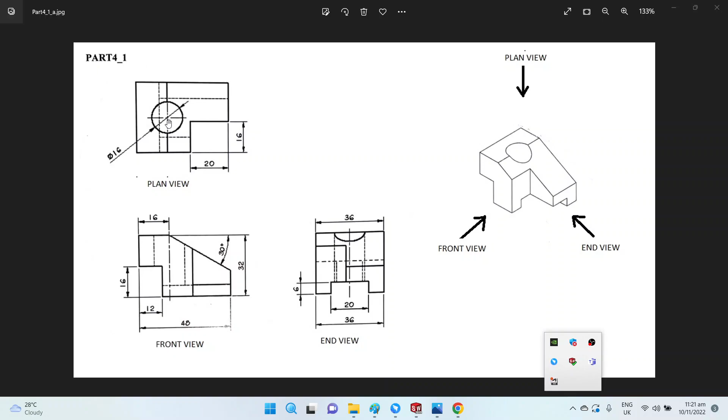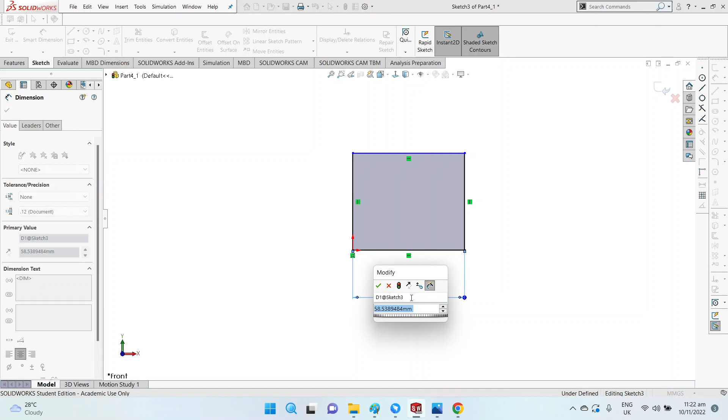Without further ado, I'll create a sketch first on the front plane. This time I'm drawing a straight rectangle with dimensions 48 millimeters in length and 32 millimeters in height. Then I will extrude.

I'll extrude from mid plane to a distance of 36 millimeters. Once that's done, I'm going over to the chamfer, found with the fillet command - click the black triangle and choose chamfer. Previously we used distance and distance options; now I'm choosing distance versus angle.

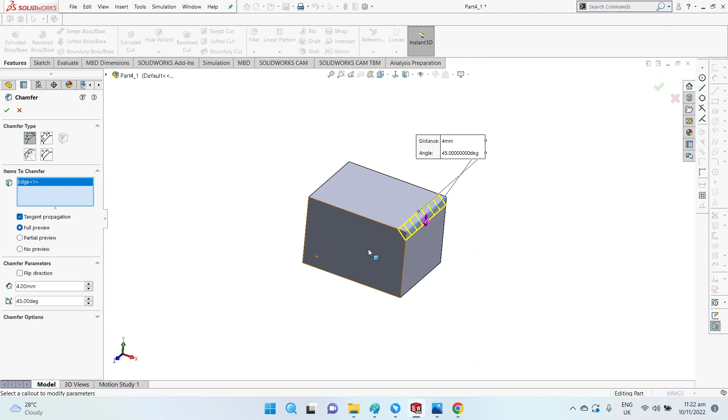I will choose this corner, and if you zoom in, let's drag this picture here. You'll see the distance of 4 millimeters is pointing down towards this point, meaning from the corner it goes down by 4 millimeters, which isn't what I want.

I want the distance to be from the corner along the horizontal plane, not the vertical plane. So I'll click flip direction, and it will flip so the distance goes from the corner along the horizontal plane.

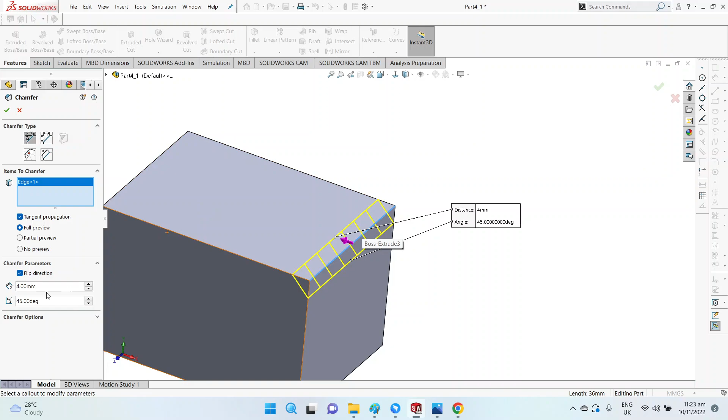Now the angle is 30 degrees, so I'll change the angle to 30 and enter. The distance is actually 48 minus 16, which gives us 32. When this is done, I click accept. This is what I have.

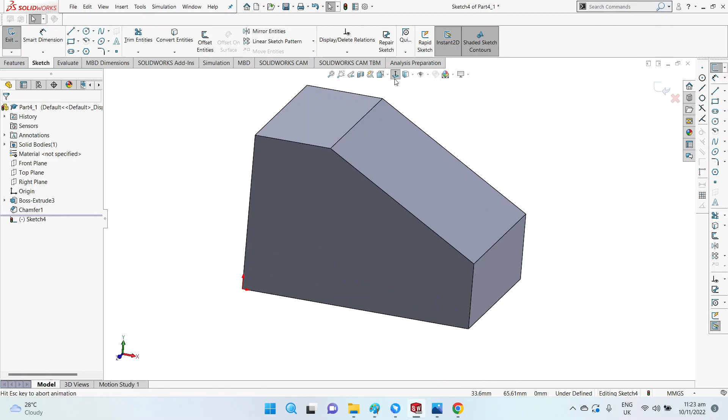Now once this is done, I'm going to create my sketch. I'll do the cutout at the bottom left hand corner. This time, instead of doing the constraints, I'll skip that since I've already explained and shown you. So I just snap to the orange dot.

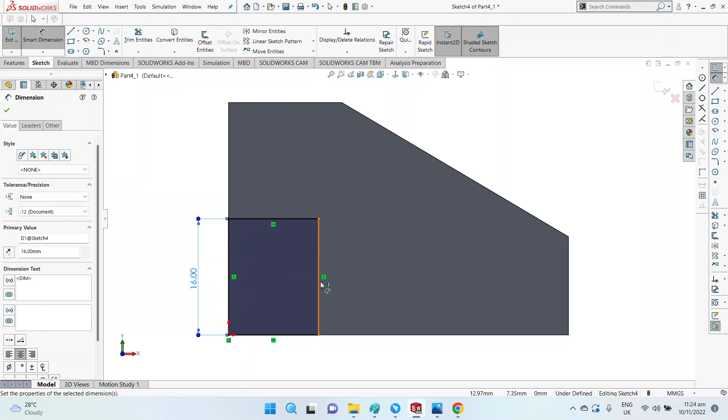You'll notice the two vertical lines and horizontal lines closest to the dot are fully constrained - they are black in color. Then I dimension the vertical height and the horizontal distance, which is 12 millimeters.

Then I will extrude cut the entire feature through all. Then I'll select sketch - wait, hang on for a second - yeah, select sketch on this surface from the top, and I'll do the cutout from the corner over here.

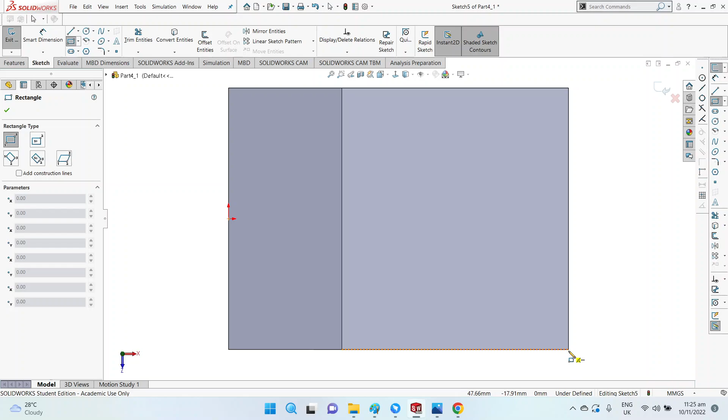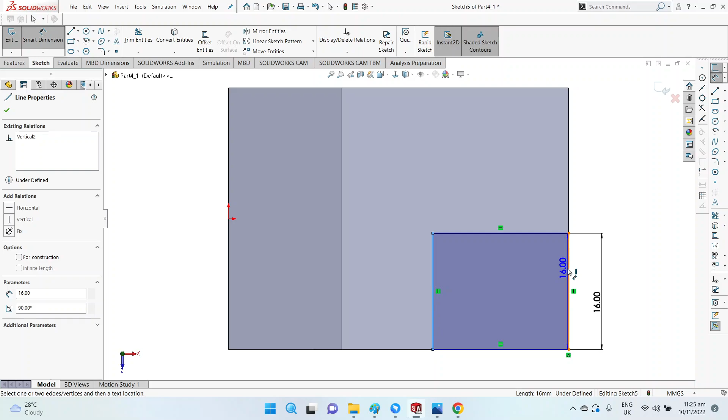Same thing, I move my mouse to the orange dot, select it, and drag it up. Then I dimension it. You see the horizontal line and vertical line are fully constrained. The height here is 16 millimeters, and the width is 20 millimeters.

Okay, then I'm going to do a feature extrude cut, and it's through all.

Alright, the next thing I want to create is the slot running through the center. I could choose this side or that side - either way is actually okay. Let me choose to sketch from this side, from the back.

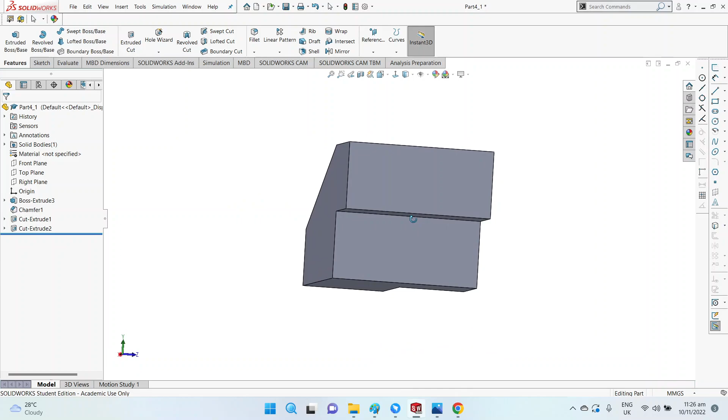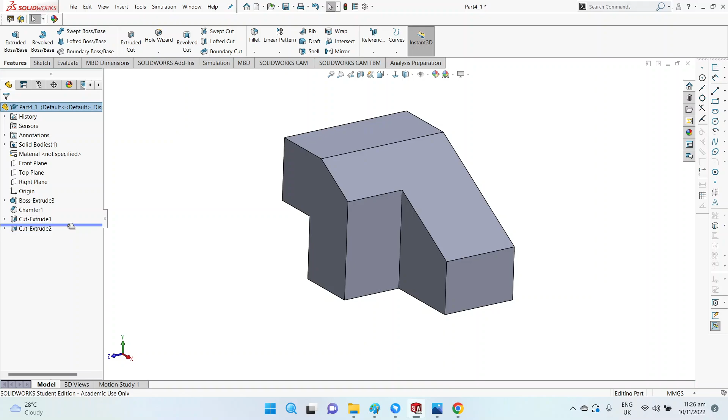I'd like to show you this interesting feature SolidWorks has. If you've created a slot and realize you want to create it later because you made a mistake - you kind of already created it but don't want to delete it since you want the slot - you can roll it back so the feature becomes hidden, but not deleted.

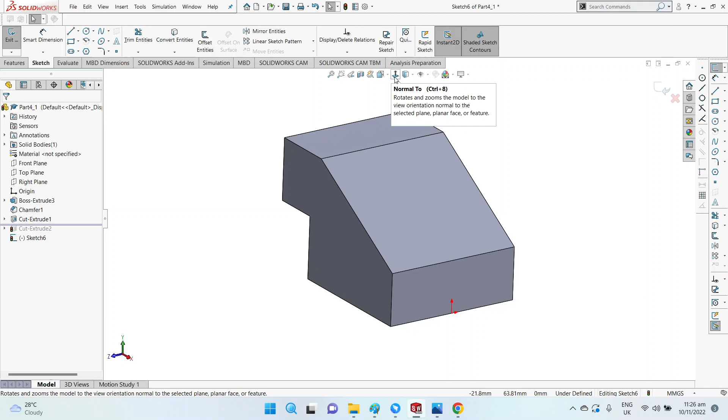So when you pinch this and roll it forward, it appears. I'll roll it back so it disappears. Actually it's easier for me to create this slot first so I can snap to the midpoint. So I'll draw a rectangle slot and just draw it over here.

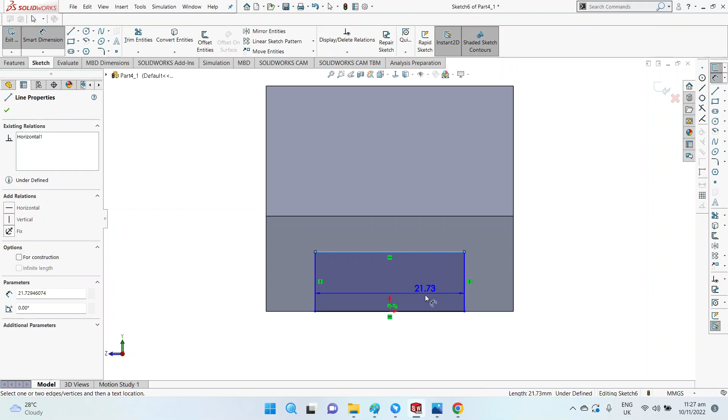I'll select the midpoint of this rectangle to coincide with the midpoint of the origin, set it as coincident, then accept it. Then I'll dimension the slot - the slot height is 6 millimeters, and the slot width is 20 millimeters. I'm going to extrude cut the whole feature.

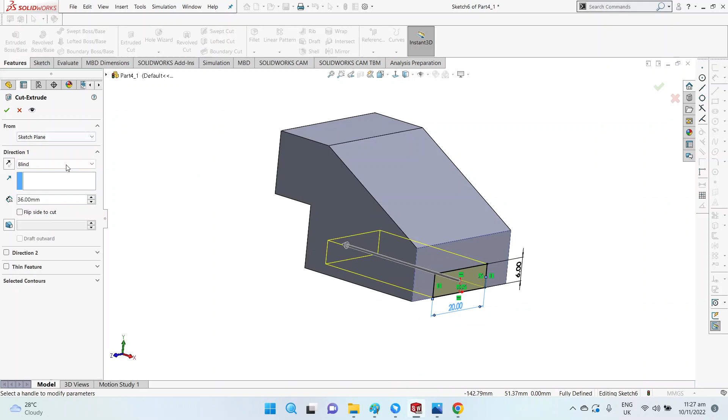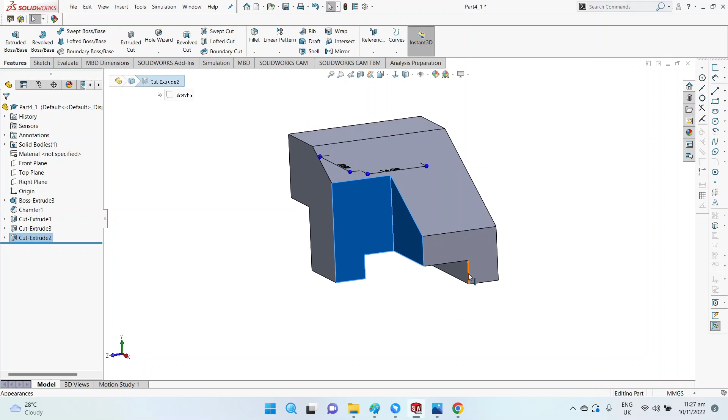Sketch plane is correct. I'm meant to click through all, and it will be cut right through. Now at this point, if I roll this feature back, I'll still get my previous feature. The reason I placed this feature last is so I could snap to my midpoint without too much confusion.

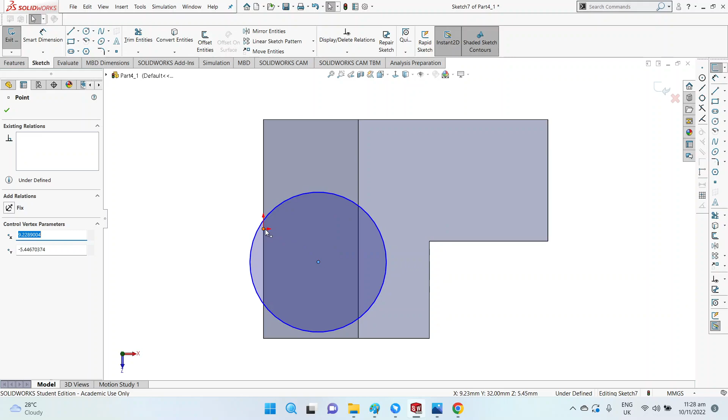Sketch over here - I'm going to do the sketch for the hole, that's the last feature. I'm going to put it here. This time I'll select this orange dot to the origin and make it horizontal. I click OK.

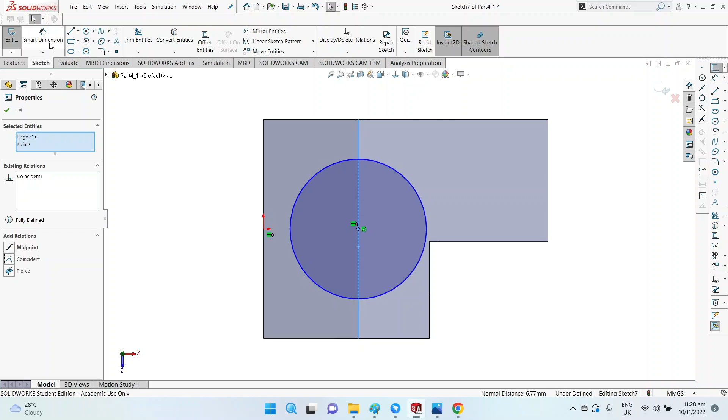Then I select this dot and this line and make the line coincident, so that this dot lies on this line as per the drawing. Then I will put a dimension here - dimension 16, diameter 16.

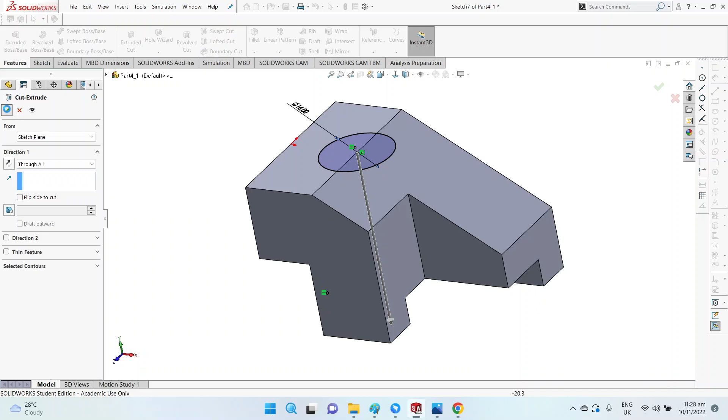And then I will do a features cut extrude, and it will be through all. Okay, so it is as such.

This is part 4-1 completed, and I will call it a day. Thank you very much for watching. I hope to see you again sometime soon.